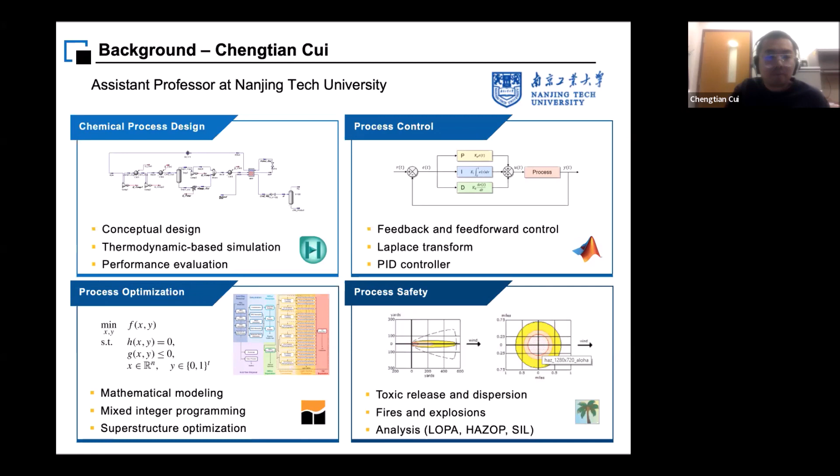Also, because my institute at Nanjing Tech was co-founded by the university and a company, Zhejiang Supcon Group, they always send me to the company to build some software projects. For example, we are building the OTS system, that's called operator training system, to train operators on site.

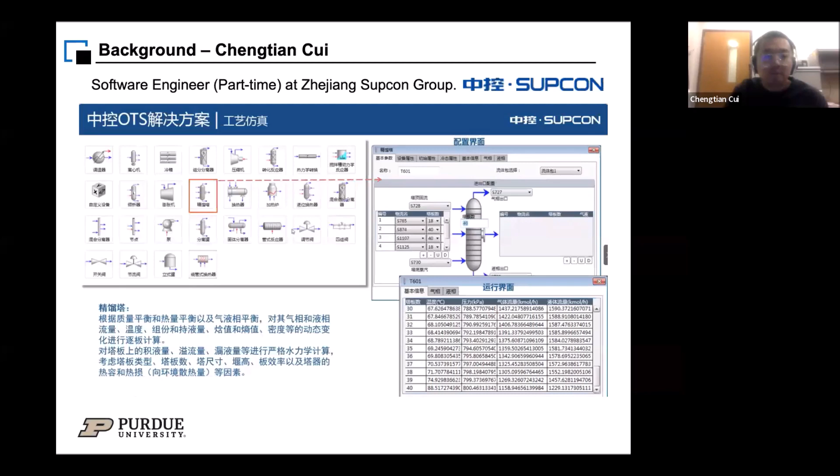The purpose of this project is to drive innovation in reducing the carbon intensity of the chemical industry, particularly the process of steam methane reforming, because this process is an endothermic chemical process. So it's very important to reduce the energy consumption and reduce the carbon emission.

Before I go to electrification, I will share some background data. For example, here is the global greenhouse gas emission. As you can see, nearly one-third of anthropogenic GHG emissions come from the industry sector, and chemicals occupy almost 20% of that, meaning this is equivalent to 6% of global GHG emissions.

Most of the emission is direct emission from the combustion of, for example, natural gas, used to generate heat and electricity. This energy is used to produce many raw materials and intermediates, for example methanol, ammonia, olefin, polymer. These are very familiar to chemical engineers.

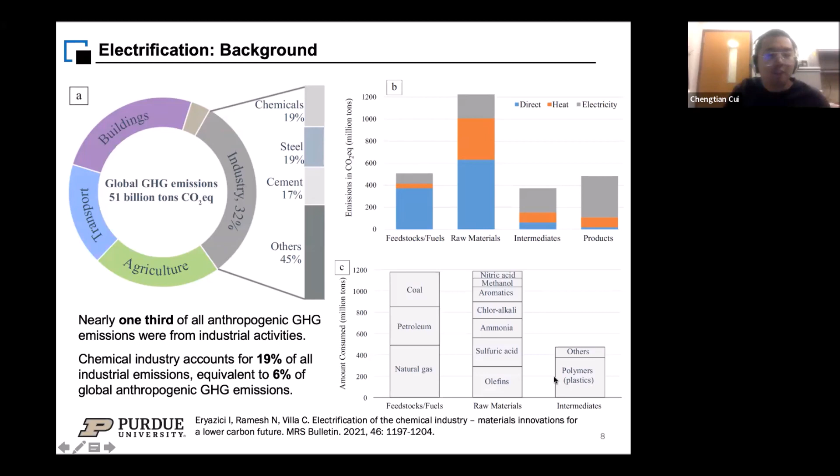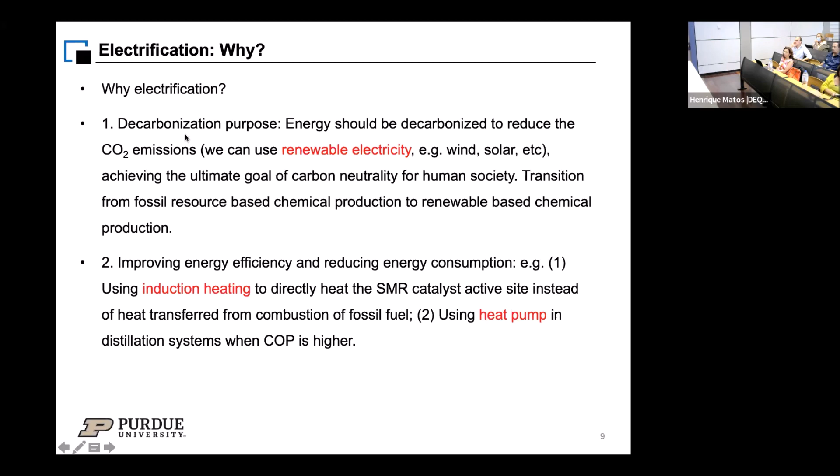But why electrification? In our opinion, we believe electrification can provide two purposes. The first one is decarbonization. Usually, combustion of fossil fuel can generate a huge amount of CO2.

But if we use renewable electricity, for example if the electricity can be generated from wind or solar, it will dramatically decrease the CO2 emission. This will help achieve the ultimate goal of carbon neutrality for human society, as there's a transition trend from fossil fuel to renewables.

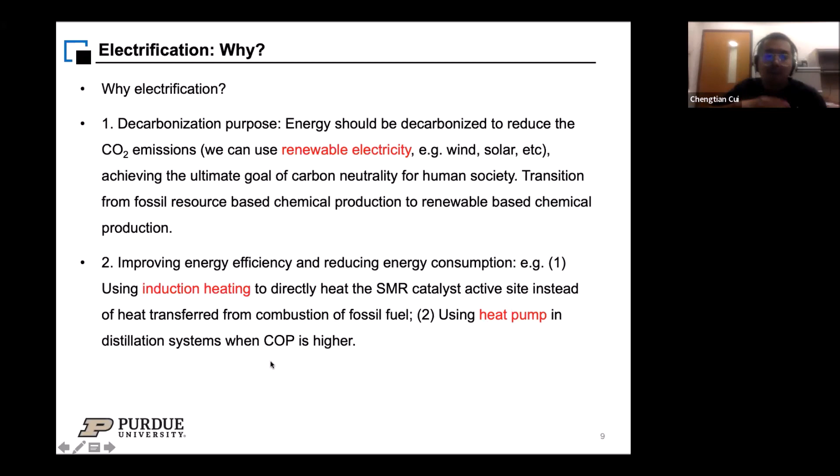The second purpose is improving energy efficiency and reducing energy consumption. For example, if you're using induction heating, this is my current project, to directly heat the steam methane reformer catalyst active site, it will increase the energy transfer efficiency. Or in a distillation process, if you use a heat pump, particularly when the COP is higher, COP means coefficient of performance. I will give you an example later.

So about electrification, there are many electrification technologies. For example, from this perspective paper, they list four types: direct heating, hydrogen, electrochemistry, and plasma. As you may see, electrochemistry and plasma technology do not have a very high technology readiness level, meaning they are at lab scale. But direct heating and hydrogen have a very high TRL, so these are two beneficial technologies that we might use in our project.

So far, we are interested in using direct heating to electrify industrial endothermic reactions and the distillation process. Why? Because the first reason is that they have a very high TRL, and the second reason is because they are easy to retrofit into the existing process.

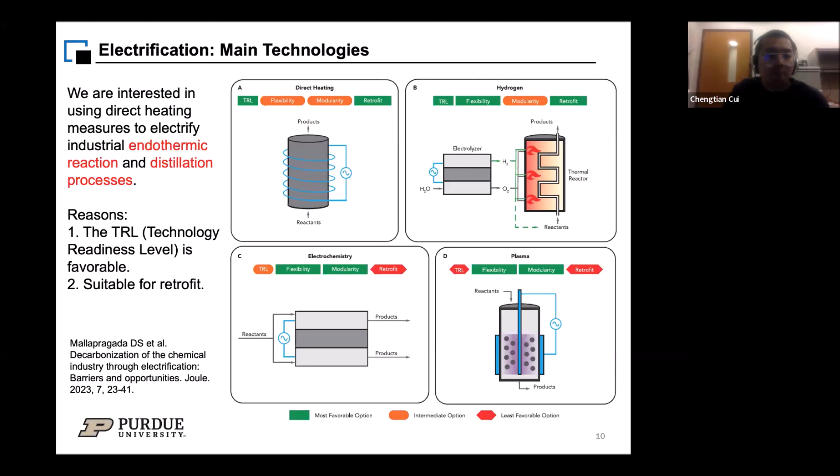This paper lists electrified heating technologies, all shown in this table. They categorize electrified heating into 3 types: direct heating, indirect heating, and steam generation.

We focus particularly on inductive heating because it can generate very high working temperatures. Resistance heating is also studied, one of my colleagues is working on this. And there's also the electrode boiler, which can be used to generate steam.

In addition to this power-to-heat technology, we also consider the heat pump. Heat pump is another measure to generate high-temperature streams using electricity-based vapor recompression.

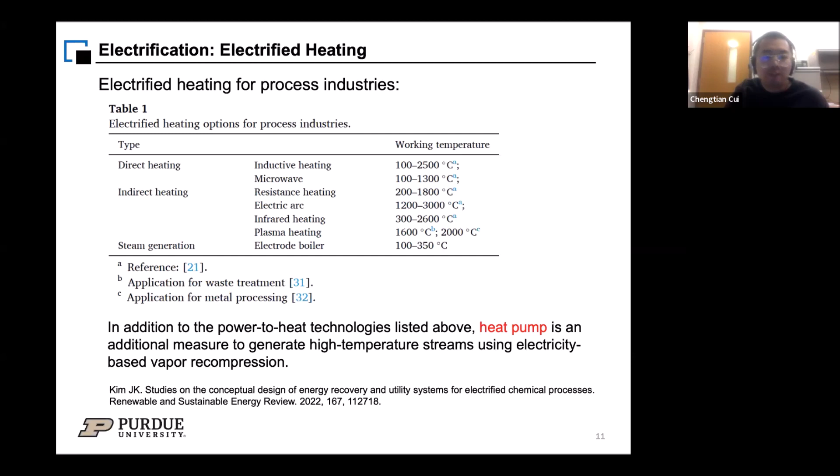If a process is completely driven by electricity, you can use low carbon electricity generated from wind and solar, and you can achieve decarbonization. But what if a process is driven by heat, which will directly release carbon into the atmosphere?

So the next question is, can this process be done electrochemically? As I said, electrochemistry has a relatively low TRL, so there aren't many processes that can be electrochemically driven. If yes, then you can design a novel process with low capital expenditure.

But if not, you may consider decarbonizing the heat, or directly using carbon capture technology to capture the CO2 or methane. If you use heat, it depends on the temperature.

If the temperature is low, for example lower than 400 degrees C, you can use a low carbon electric stream. But if it's high, you may consider some low carbon electrical heating like induction, resistance, and so on. I will talk about it later.

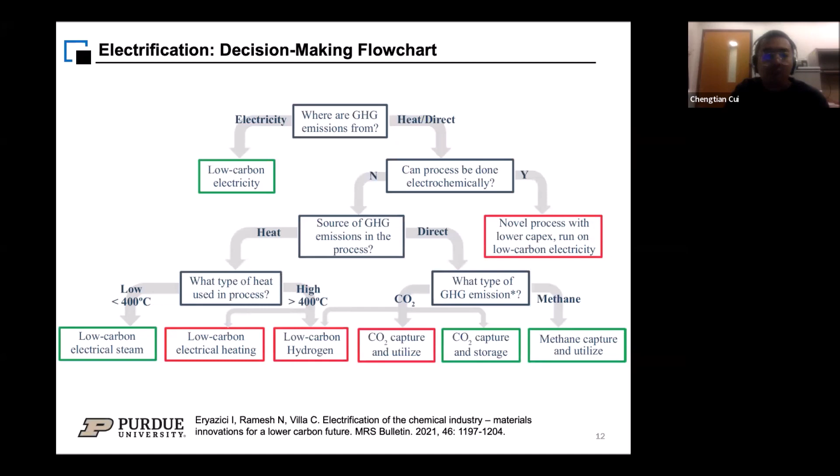For chemical process design, the onion model is very useful. This is a very famous model. Chemical reaction is in the inner layer, so it's the core of the chemical plant.

Particularly, we are interested in endothermic reactions because they need energy. In the next layer about separation and recycle systems, we are interested in distillation. Of course, there are many separation measures: distillation, absorption, pressure swing adsorption, extraction, and more. But distillation consumes a lot of energy.

Distillation is used for more than 95% of liquid separation, and the energy used for this process is estimated at 3% of world energy consumption. In another data point, it accounts for almost 50% of energy use in whole chemical plants. So distillation is very energy intensive.

The next layer is about the heat recovery system. In designing a heat exchanger network, we may consider using pinch analysis. For example, you can use this method to determine the minimum heat input and minimum heat output. Then, in the next layer of designing the energy and utility system, you may use this to calculate how much energy is needed for the process.

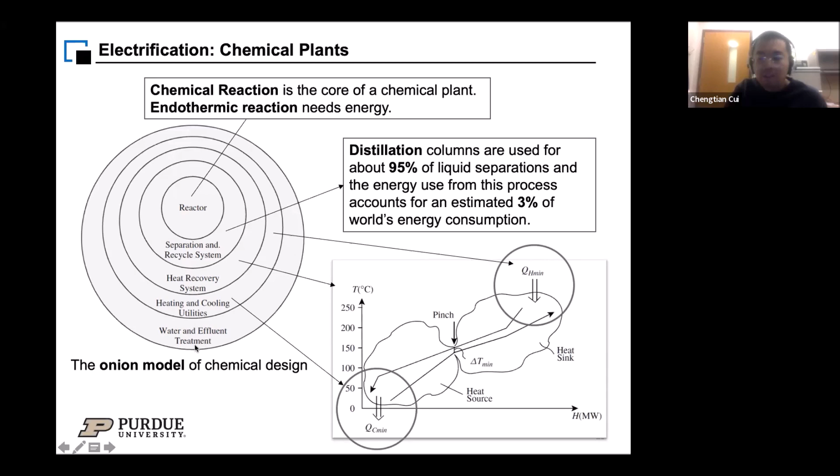And water treatment is another problem, though it's not in the field of decarbonization.

For the electrification of reactions, currently the US has a very large amount of shale gas. Shale gas is also a type of fossil fuel, but we believe that completely transitioning from fossil fuel to renewable is not yet possible.

So there's an intermediate solution. Here is the intermediate solution: we use fossil resources as a carbon source. For example, we use shale gas as a carbon source, but we use renewable electricity as the energy source.

For example, in this reactor we use shale gas as a carbon source to produce liquid fuel, but to drive the reactor we use solar energy and wind energy. Because this process also produces hydrogen, the hydrogen can be self-used to produce electricity for the process.

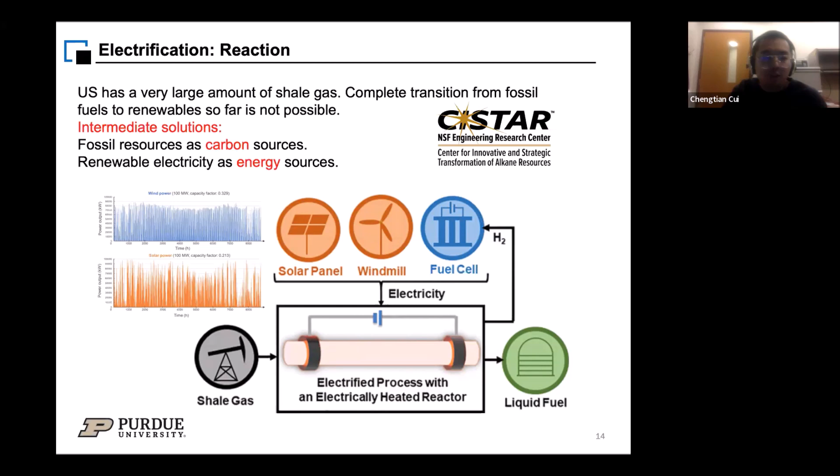Another question is that solar and wind are intermittent, changing with time, weather, and climate. So it is difficult to build a model for this whole process.

One of my colleagues studies resistance heating, but my research is focused on induction heating. For example, this is ethane cracking to produce ethylene and hydrogen. He studied two types of heating: one is external heating, where you put the coil outside the reactor, and the other is internal resistance heating, where you put the coil inside the reactor.

We have done some simulation, and we found internal resistant heat is better. We are still co-authoring this paper now.

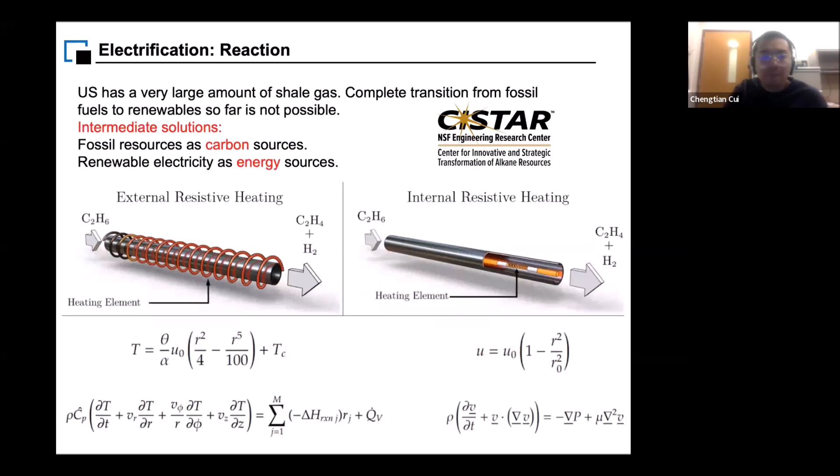But for the electrification of distillation, one of the most widely used electrification measures is the heat pump. For the conventional distillation, as you can see, the heat supply in the reboiler is wasted in the condenser.

As you can see, the temperature cascade - this is a condenser, this is a reboiler - so it cannot reuse this type of energy to heat the reboiler.

But what if you added a heat pump here? You compress the overhead vapor, and the overhead vapor will get a high temperature, and then you can use it

to heat the reboiler. So in this process, the self-heat inside the process is completely recycled by adding electricity, by adding the work. So there's no more additional heat needed.

Because the work is normally electricity, the electricity can be coming from wind and solar, so it comes from renewable sources. It can achieve decarbonization.

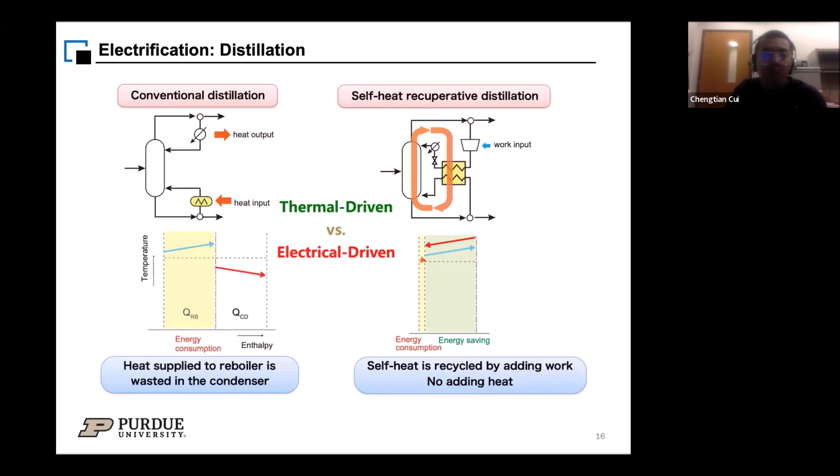And the next layer is about electrified heat exchanger network. This is a relatively young research field. But this is the old paper because it only considers the organic Rankine cycle. Organic Rankine cycle is a way to transform waste heat to power.

But what if we added a heat pump somewhere in the heat exchanger network superstructure? We might get a new mathematical formulation and maybe get some new ideas.

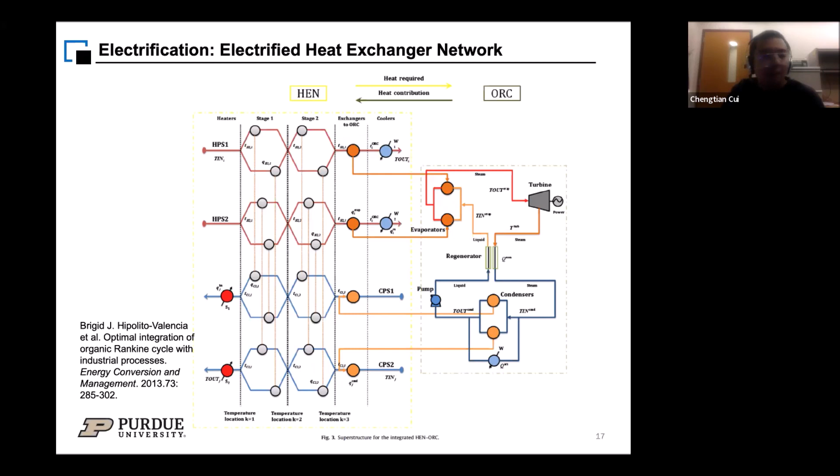Finally, layers about the energy system or utility system. In the conventional utility system, the furnace, the boiler, and the steam turbines all rely on the combustion of fossil fuel. For example, if this temperature is high, you can use this process stream to generate low pressure steam.

But the waste heat must be cooled by the cooling water. This is called the grand composite curve. Using this, you can determine which energy is needed.

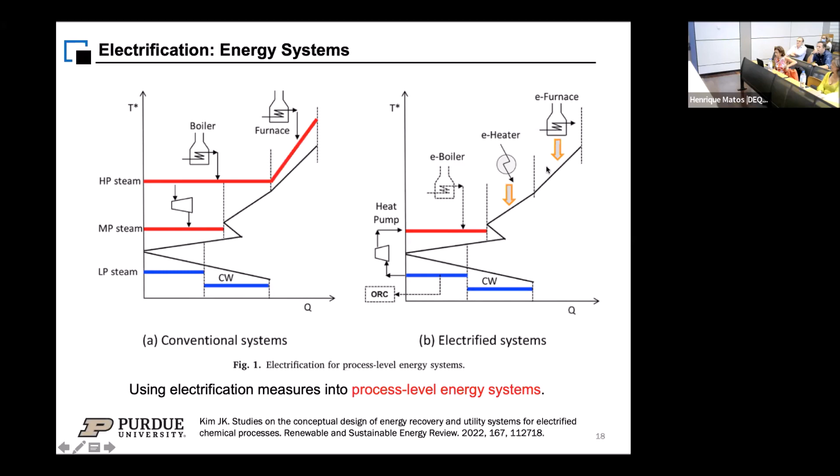But for the electrified system, we might totally consider the process heat generated from electricity.

For example, this E-furnace can generate relatively high temperature for the process, and the E-heater can provide intermediate temperature.

What if a process needs steam? You can use an E-boiler to generate steam for the process. Also, for the low temperature process stream, you can use ORC to generate power for the heat pump, or you can upgrade the energy to heat the process.

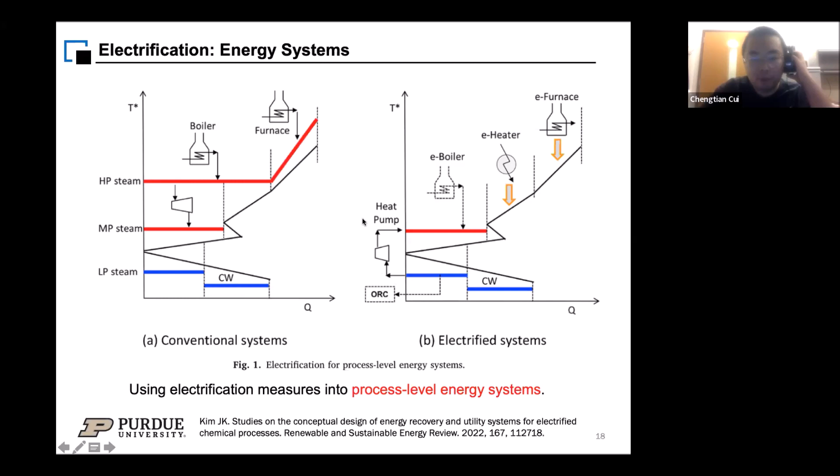Okay, this is the electrification measure that can be used in the process level energy system. About my current postdoc project, I'm focused on the electrification of steam methane reforming. Steam methane reforming is a way to produce hydrogen.

Hydrogen is very important. Normally, you can use water electrolysis to produce green hydrogen, but this technology so far is very high cost.

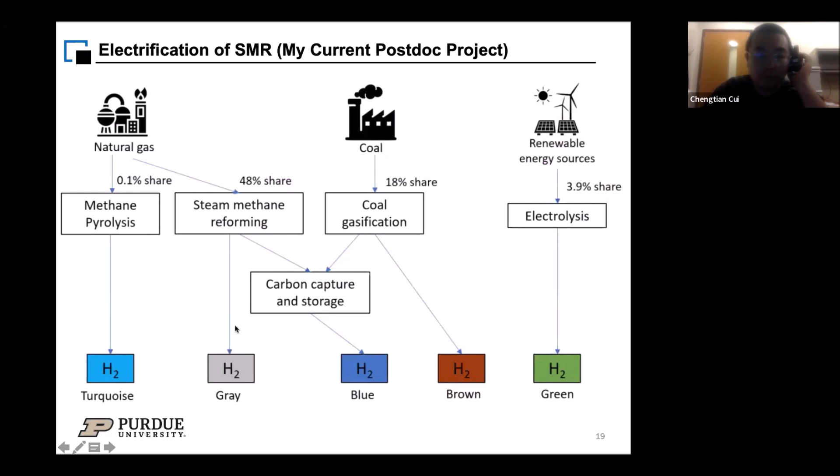So normally, we are still focused on using natural gas or shale gas as a carbon source for generating hydrogen, although it's not green hydrogen.

Okay, this is a conventional top-fired SMR reactor. It's relying on combustion of fossil fuel to generate radiation heat, and the radiation heat will go into the reactor wall.

And through the heat conduction, through the wall to gas heat transfer, and through the heat convection between the solid and the gas, it finally gets into the catalyst active site.

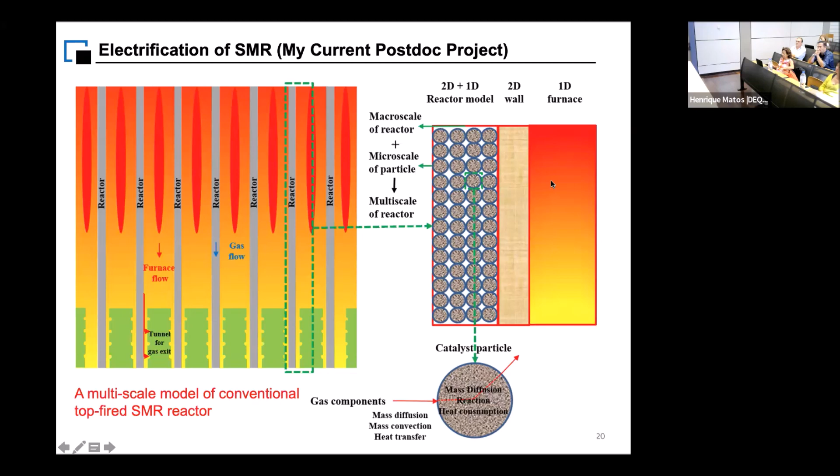So this heat transfer process is not very energy efficient. So our work is on using induction heating to improve the heat transfer efficiency and reduce the carbon emission.

Okay, for the conventional top-fired SMR reactor, we may use this - this is the material balance for the bulk gas, and this is the energy balance for the bulk gas.

We might consider the material dispersion. We may consider the heat conduction, heat convection, heat dispersion, and solid to gas heat transfer.

And for the catalyst domain, we might consider the diffusion, and we might consider the reaction heat, and this is the conduction.

You see in the conventional process, the heat needs to get into the catalyst active site, and the material gets out from the catalyst. This is a way of modeling the process.

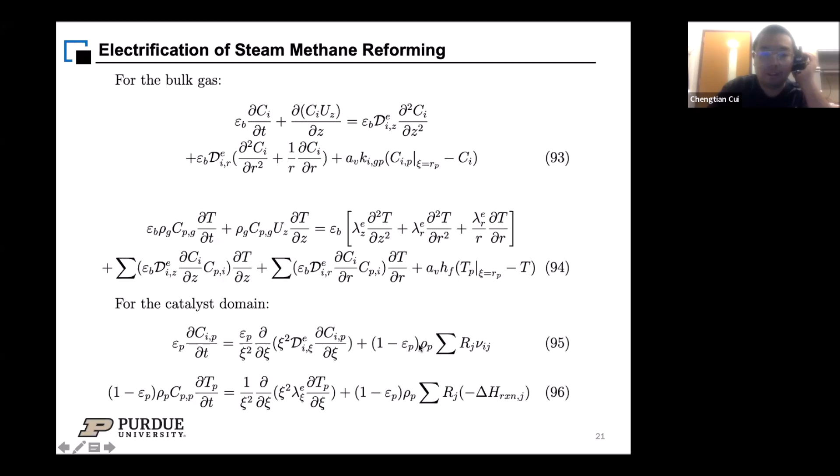But now our project is working like this. This is the entire flow sheet for generating hydrogen from natural gas.

So far we focused on the steam reformer using the induction heater, and the heat from the induction heater is from renewable energy.

Okay, and after this reactor, we may consider electrification of the water gas shift unit, and finally we aim to simulate the whole process. This is the new electrification of shale gas based hydrogen production process, where the carbon source is shale gas and the energy source is renewables.

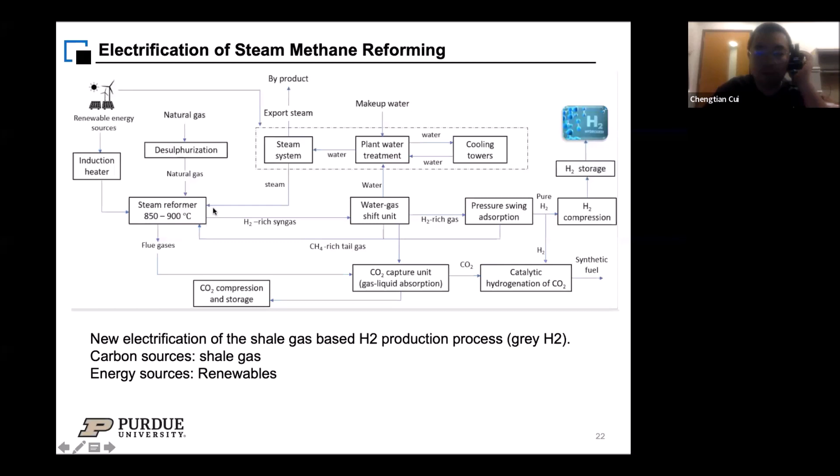When we talk about induction heating, it is normally generated by the alternating magnetic field. This alternating magnetic field can generate a mechanism called hysteresis, which is the main focus in our study. You may also consider eddy current and magnetic resonance, but these two mechanisms are relatively low in our study.

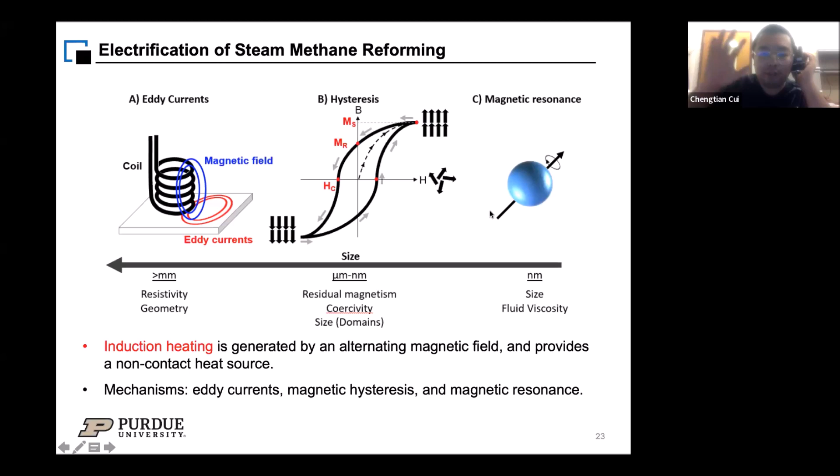Here is the reactor. This is the conventional top-fired steam methane reformer, generated by thermal heating. But here, this is the induction-heated steam reformer. We use a coil around the reactor, and this is the alternating coil. As you know, an alternating coil can generate alternating magnetic fields.

And you can put one of the elements called cobalt inside. Why do we use cobalt? Because we use a catalyst to produce hysteresis heating inside the catalyst particle. So if you want to use this induction heating, the catalyst must be used as a susceptor to be ferromagnetic.

Ferromagnetic elements, including nickel, iron, and cobalt, have a concept called Curie temperature. If the temperature goes over this Curie temperature, the element will change from ferromagnetic to paramagnetic, meaning there's no more hysteresis heating. Because the SMR reactor operates over 800 degrees C, from this temperature we may only consider the cobalt element. We should put cobalt into the catalyst, and it will generate on-site in-situ heat inside the catalyst.

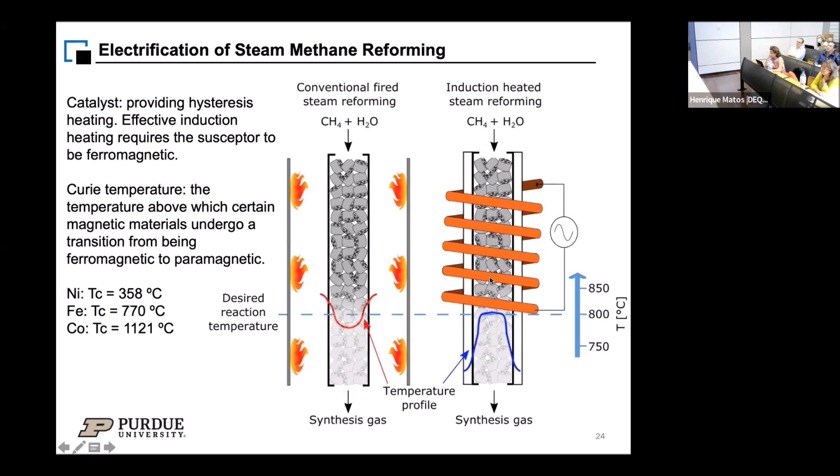Also, as I said, in the conventional process heat must be transferred from outside to the inside. But here, the heat can be generated at the catalyst active site, so it will improve the energy efficiency. I'm still collecting data for this paper, so I will present the whole paper at the coming ASME meeting.

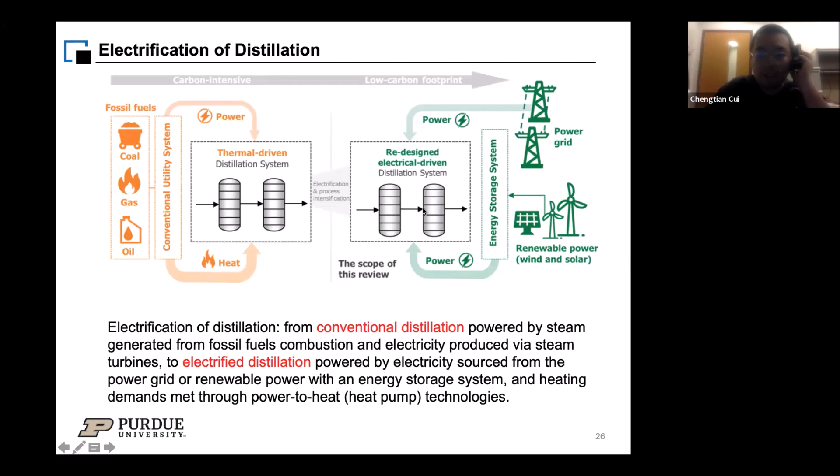As far as the electrification of distillation, we have done a lot of work. In the conventional distillation process, the column is completely driven by the combustion of fossil fuel. But in our new design, we wish to use the power grid or renewable power combined with an energy storage system to drive a redesigned, electrically driven distillation process.

This is what we have done. Normally a heat pump, for example mechanical vapor recompression, can be used to compress the overhead vapor to drive the reboiler. But we need to know that when you compress a vapor, it might generate some liquid droplets that will damage your compressor blades.

So it is necessary to superheat the stream before it goes into the compressor. You might need to preheat the overhead stream beforehand.

If the process does not need so much energy to drive, you might split some vapor here to save power in the compressor, or you might use the compressed stream to first heat the reboiler and then preheat the stream before the compressor, and then go into the condenser.

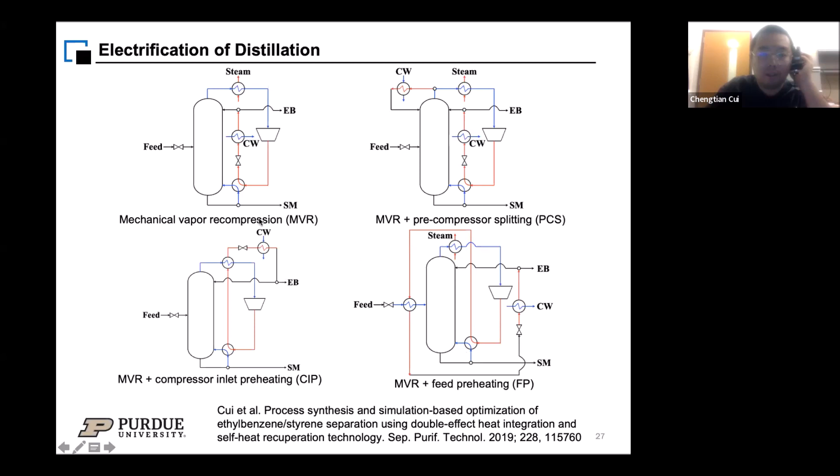Or another way is to use this one: you might use it to drive the reboiler first and then use it for feed preheating. This is the fourth method. We are combining these four methods as a superstructure.

As you can see, this is the pre-compressor splitting, this is the compressor inlet preheating, and this is the feed preheating. We designed this process superstructure using Aspen Plus.

Because Aspen Plus is not very good for process optimization, we connected Aspen Plus with MATLAB and designed an optimization algorithm. We achieved communication of data between them to optimize the whole process.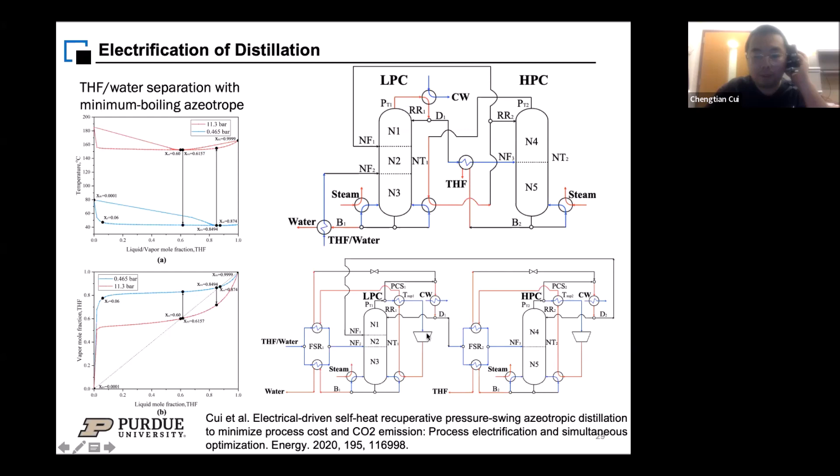It is completely driven by heat, but here we are using the compressor to drive the process. This is also a process superstructure.

This is the result in the conventional process, as you can see in the grand composite curve. This energy must be driven by the medium pressure steam. This process has a very low temperature requirement, so it can be driven by the low pressure steam. Also, some of the waste heat must be taken away by the cooling water.

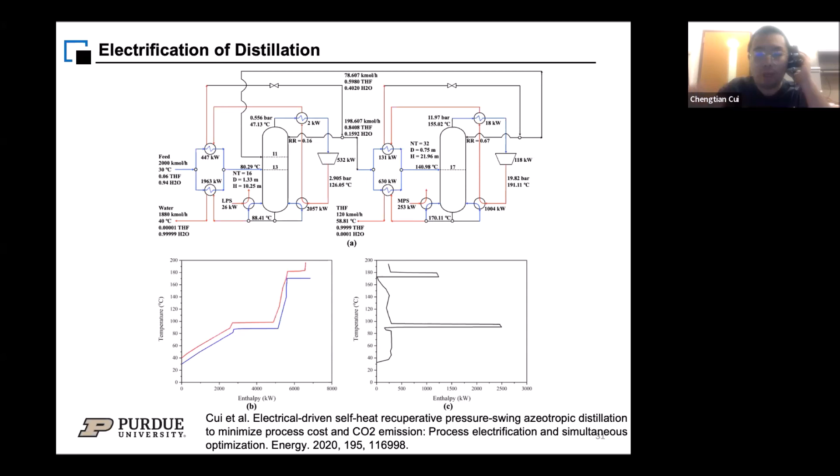However, in the electrical driving distillation process, as you can see, most this pocket means there's no cooling water needed for the process. Also, this is not closed, so it still needs some heat, but this heat can be generated from an e-burner, for example, and the complete process is driven by electricity. So this way, it can be used to drive the whole process by electricity.

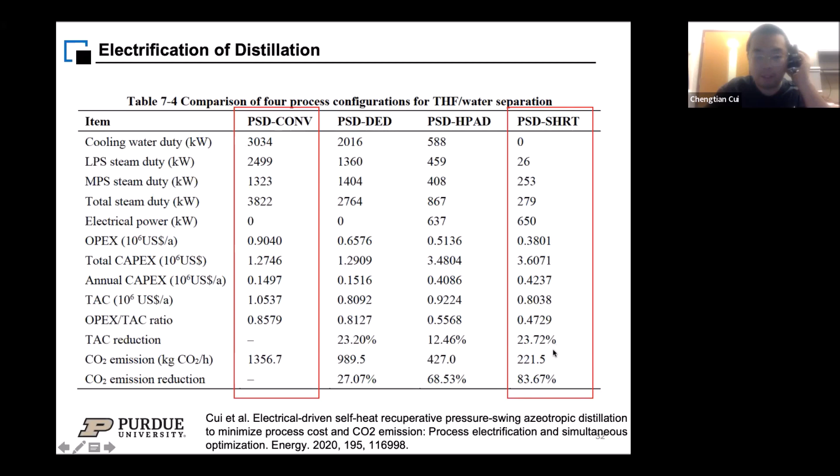Here is a steady state comparison. For example, here is the conventional. This is the result of the conventional PSD, and this is the result of a PSD-SHRT. The electrical process can achieve more than 20% of TAC reduction and more than 80% of CO2 emission reduction.

Also, we designed the control structure to see if this electrical process can have better dynamic performance. Here is the control structure for the conventional one. It's very easy - for example, the pressure is controlled by the cooling water, and we use a single end temperature control.

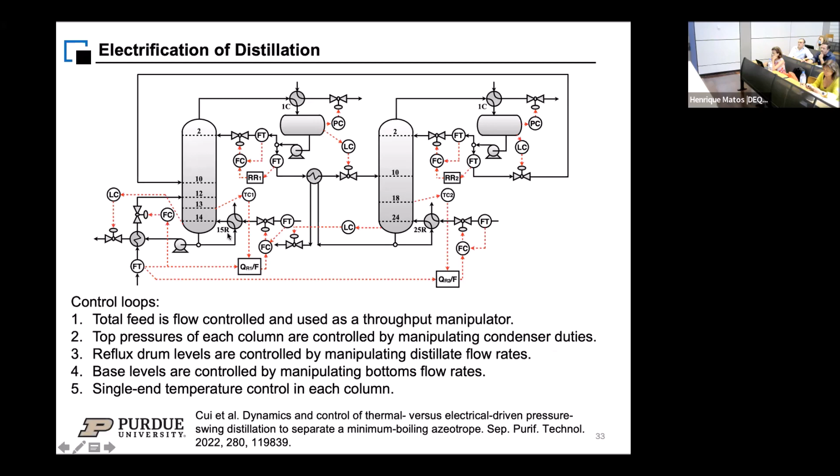The column temperature is controlled by the reboiler duty. This is also the single end temperature control. As we added some disturbance, for example feed throughput disturbance, all the parameters can return back to the nominal value very quickly.

Also, we designed the control structure for the electrical process. As you can see, we also use the single end temperature control loop, but here the temperature must be controlled by the compressor power also. An additional reflux over feed forward controller is added in order to stabilize the whole process.

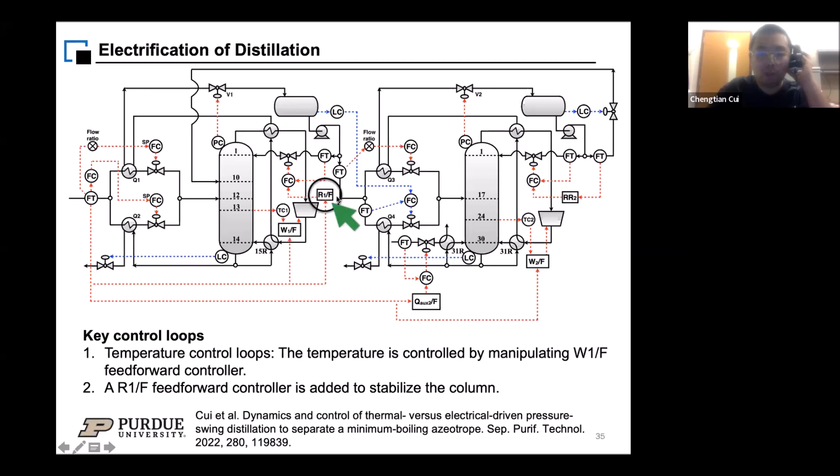We also do the dynamic performance comparison. As we can see, the control performance is also very good. So we can see if a process has better steady state performance and dynamic performance, we can recommend this process to the industry.

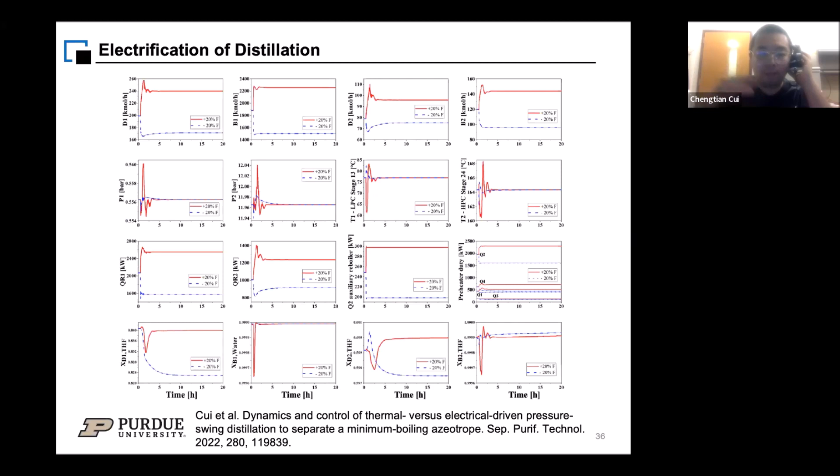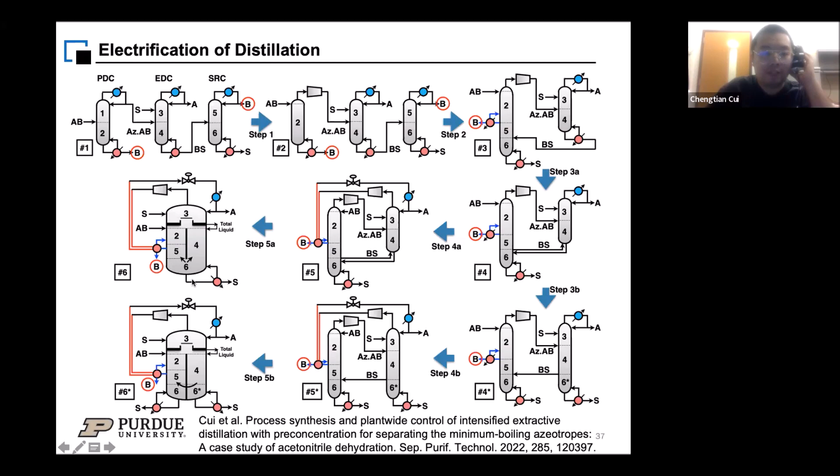Also, we introduce the electrification measure to the extractive distillation process. This is a design framework from the conventional extractive distillation to the final electrified extractive dividing wall column. This is the design framework.

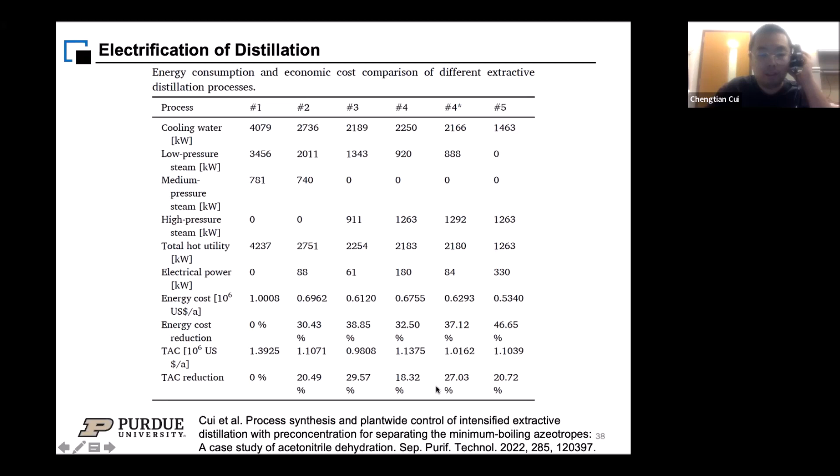We also do some steady state optimization project, and we see the electrical process can save approximately 20% total annualized cost compared to the conventional process. We also do some dynamic process design, and we found that the new electrical process can be completely under control. So we guess it can be recommended to the industry.

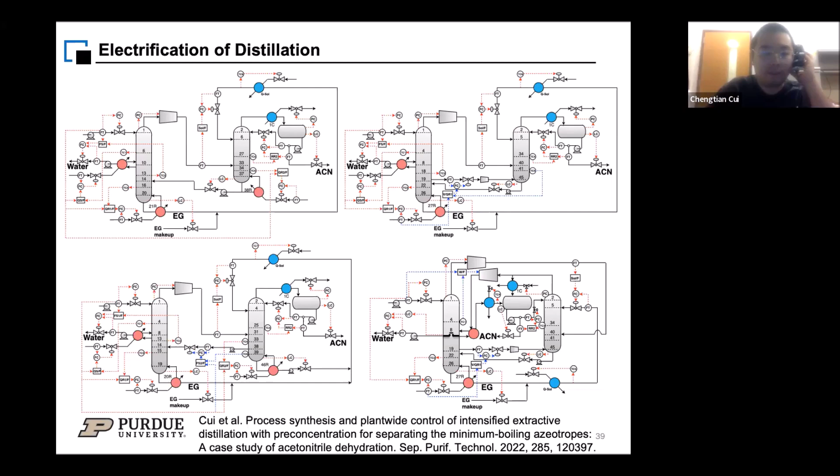This is my future project. Now I'm very, very interested in electrification. So there is a research field called Power to X.

Power to X - power can be generated from renewable sources. X may mean methane, ammonia, methanol, but it needs some additional process. For example, if you want to produce methanol, you might need to integrate with green hydrogen production. There is water electrolysis. I am very interested in how to design and model the water electrolysis now.

Also, you might need the carbon source, but the carbon source can be from the atmosphere - for example, direct air capture, or this carbon source can come from, for example, a power plant or something. And also, we might need an air separation unit to build the whole process. We are going to maybe design some process for production of methanol, ammonia, something.

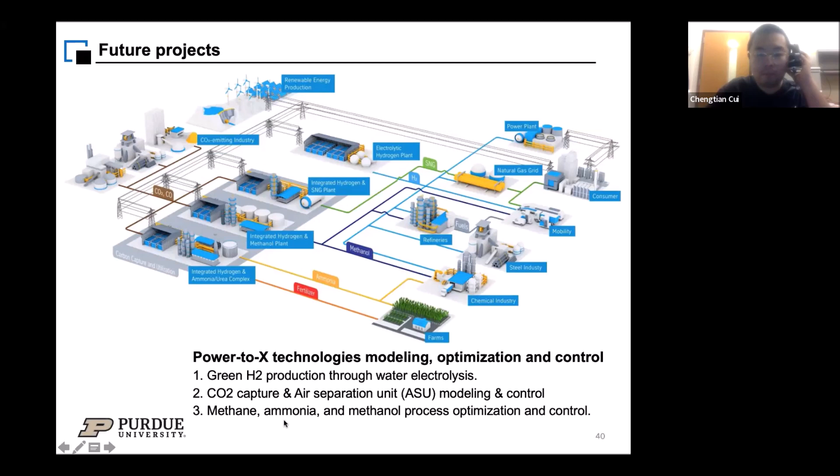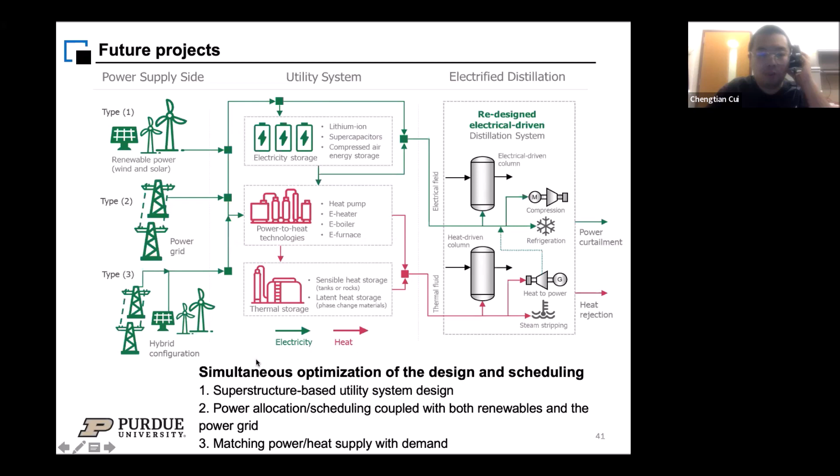Also, because if you want to drive a process, you must still consider the energy sources. As I said, the wind power is intermittent, so it is difficult to model the process. So, in our opinion, it is needed to design a simultaneous optimization method that considers the process design and scheduling.

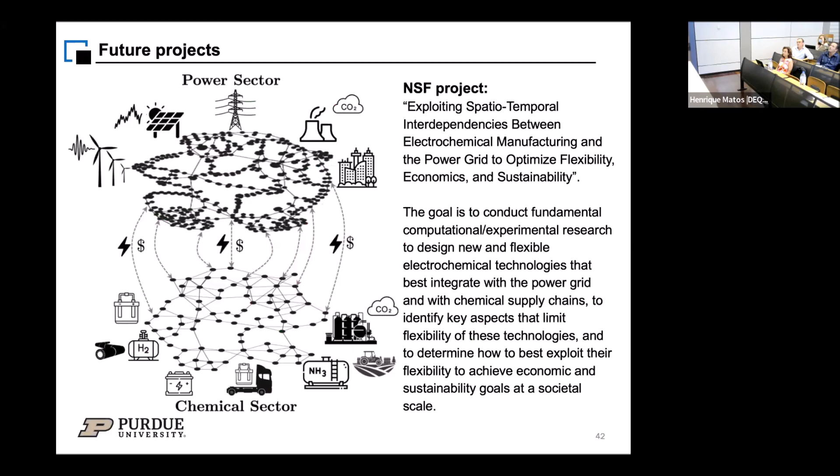Recently, the US NSF has launched a new project exploring the space and time interdependency between electrochemical, chemical industry and the power sector. So in my future work, I might combine these two disciplines to design the whole process that can be used to completely achieve decarbonization of the power system and the chemical sector.